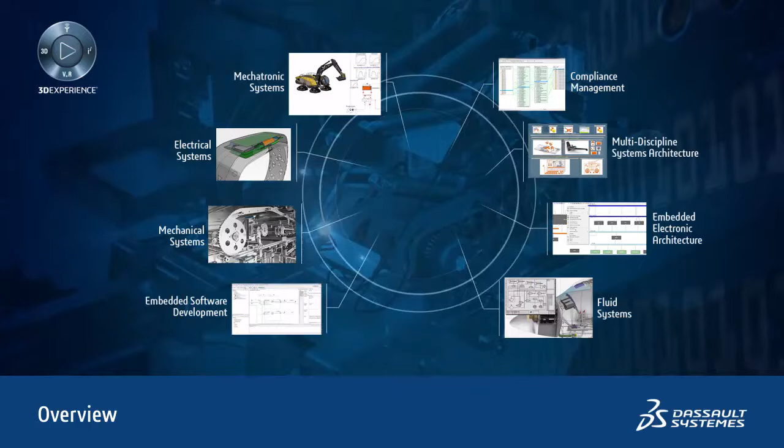Today, you'll learn how the Dassault Systèmes 3DEXPERIENCE platform connects all aspects of complex systems to streamline multiple disciplines by using the power of 3D to simulate and validate the behavior of products and their embedded systems. The platform delivers an integrated model-based systems engineering environment to imagine, engineer, and experience high-fidelity digital connected replicas that accurately predict a product or system's behavior through 3DEXPERIENCE, just like in real life.

But why do we want to put 3DEXPERIENCE at the heart of the systems development process? Because in many industries, up to 80% of product innovations come from embedded systems. These systems can account for up to 20 to 40% of a product's development costs. And yet, for more than 60% of the development time, no real prototypes exist.

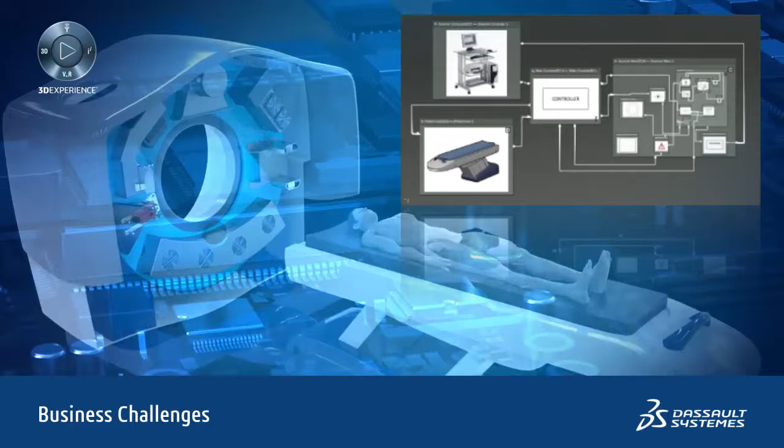And even when they do exist, they're costly to produce and often incorrectly defined and are utilized in a suboptimal way. Less than 10% of systems engineers typically get validation time with these prototypes, resulting in a late discovery of system errors. Errors that are often caused by system architects' choices not being validated until late in the design process, resulting in system elements not behaving as expected when they're integrated with other systems and the overall product.

This complexity, when coupled with the ever-increasing requirement to comply with stringent regulatory and industry standards, results in more than 40% of projects being delivered late or even failing altogether through the poor management and traceability of systems requirements.

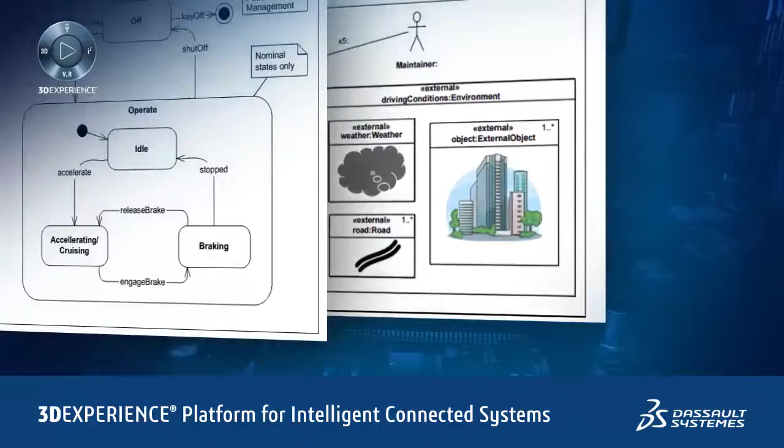These problems are caused by engineers using a multitude of disconnected systems engineering tools that can create thousands of different models of the systems being developed, with each tool having its own view or model of the system. But these individual models are largely disconnected from each other, as they are authored and managed by different legacy and proprietary tools.

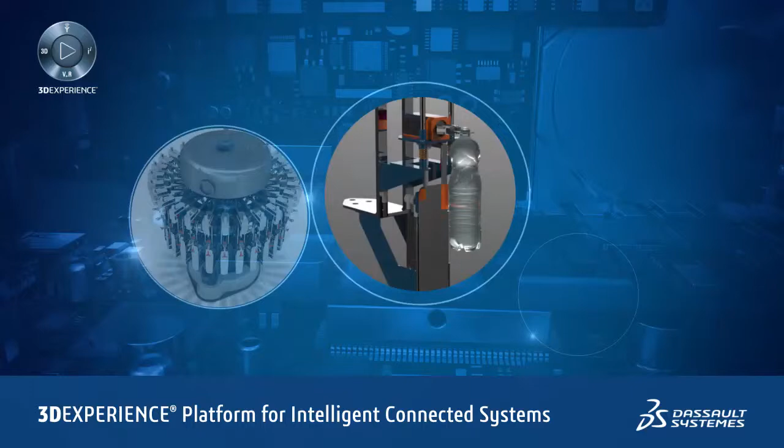This makes it difficult to build complete and consistent system views that integrate multiple engineering disciplines. It makes it extremely complex and costly to model and simulate the behavior of systems in the context of a complete product, and also impossible to easily reuse system assets across multiple product options and programs.

The business impact of these issues is increasingly serious. Programs are delayed, products are poorly integrated with suboptimal system design, and engineering costs are inflated by unsynchronized and duplicated development effort. And it's getting worse.

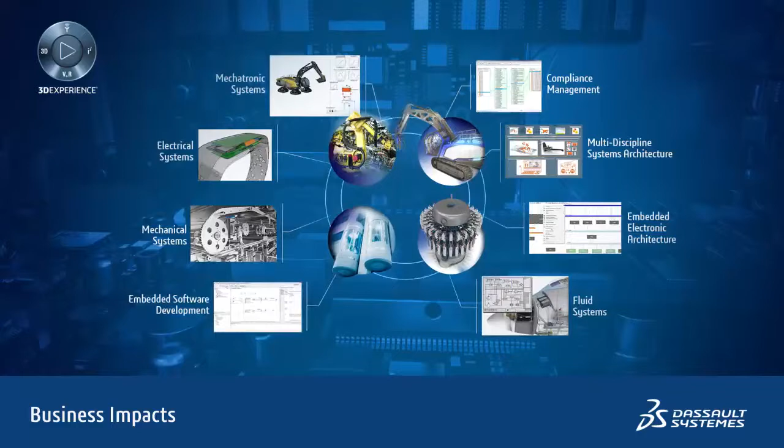As product complexity and demands for variance increases, it becomes more difficult to master and optimize the development effort, often resulting in duplicated data. This data becomes difficult to manage across all programs, options, and variants.

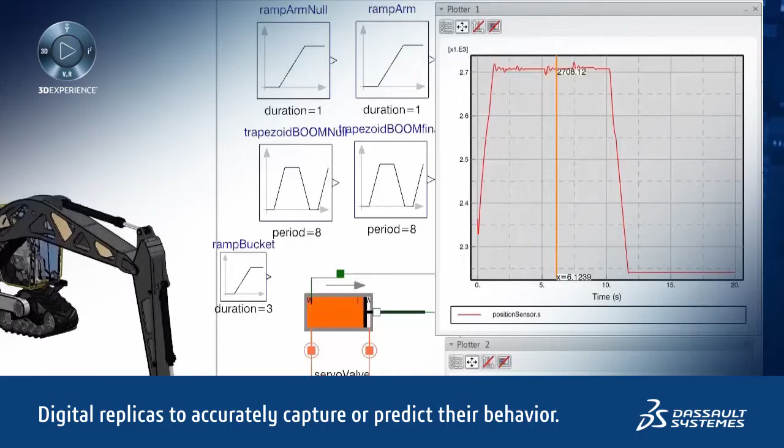What's needed to address these challenges is an integrated model-based systems engineering environment that drives the creation and management of digital replicas, existing or future systems, to accurately capture or predict their behavior.

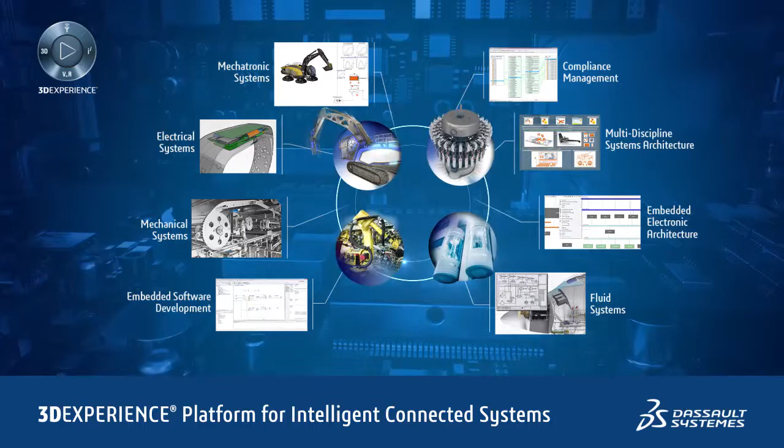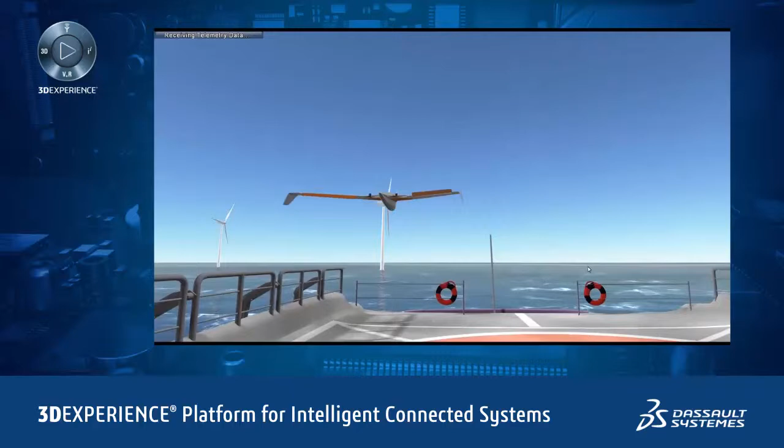We create these 3D experiences by using an open development environment that brings all engineering disciplines together to collaborate, define, and share a common and consistent systems definition. A definition we use to model and simulate the behavior of systems in the context of a complete product and its environment, just like in real life, and reuse system assets across multiple product programs and model families.

Dassault Systèmes addresses these challenges with a collaborative and open 3D experience platform for model-based systems engineering. This platform enables users to design and experience connected products and systems through a continuous, intelligent engineering development process. Let's explore what we mean by 3D experience in the context of systems engineering in an intelligently connected environment.

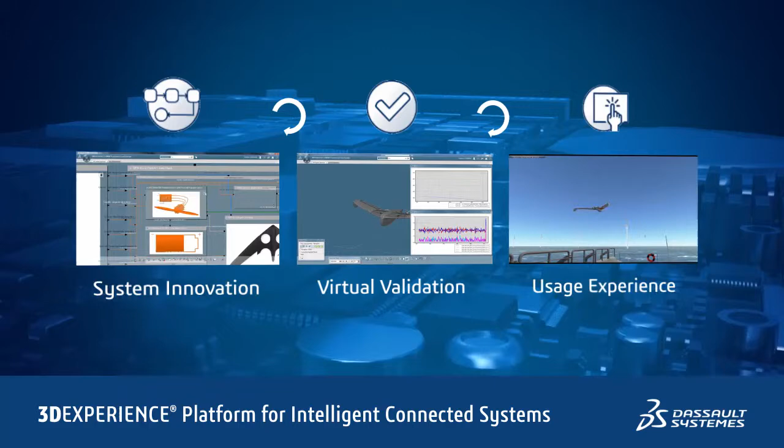We provide an end-to-end solution with digital continuity to design complex products and systems, starting from their planned usage through the design and implementation, and optimize, verify, and validate these systems through virtual simulations at the conceptual design stage, reducing the need for physical prototypes. The closed-loop digital continuity between design and validation improves engineering productivity and delivers improved product quality.

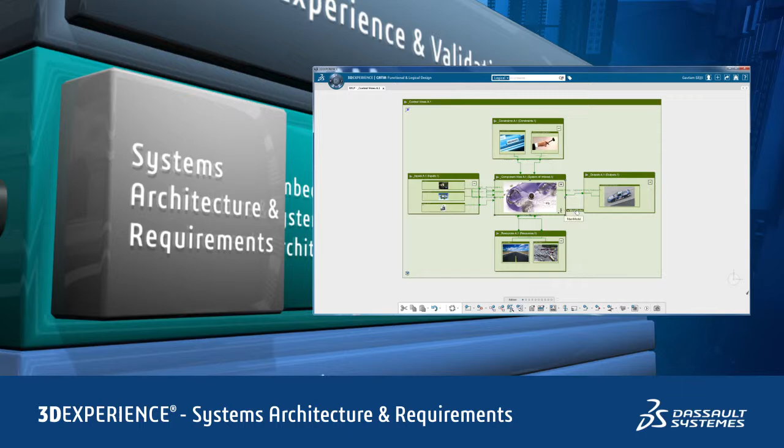This 3DEXPERIENCE platform is an open environment that can be used in conjunction with your existing tools and adapted to suit your processes. It comprises a set of integrated applications that covers systems architecture and requirements, to define and compose the system by considering multiple viewpoints through a set of integrated requirements and architectural models.

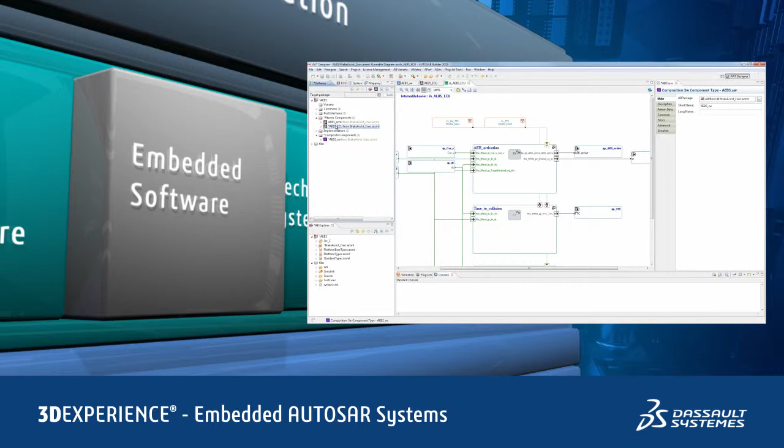Systems embedded architecture, to define, manage, and implement complete embedded architectures with electronic and electrical components and their interfaces. Embedded software solution includes AUTOSAR Builder, a rich toolset for developing AUTOSAR-compliant embedded systems for the automotive and construction equipment industries. And Control Build, a rich solution that accelerates the design, development, and validation of control systems that comply with industry and regulatory standards such as EN 50128 and IEC 61131-3 for the train, railway, process energy, and plant automation industries.

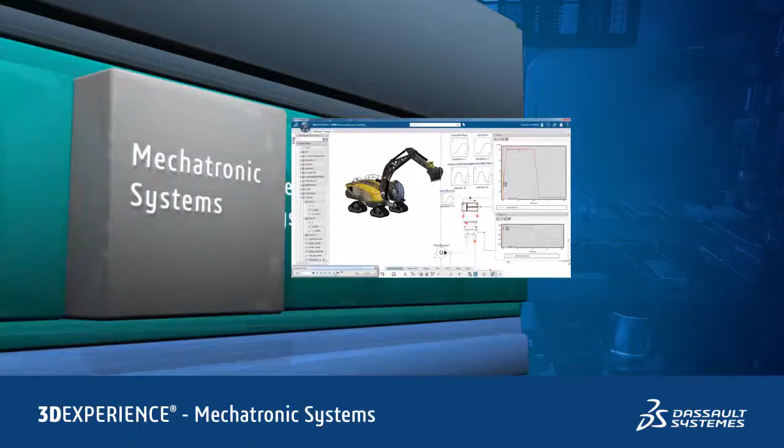Mechatronic system behavior modeling using open standards Modelica and functional mockup interface, where we simulate the system definition to predict and validate upfront the system behavior.

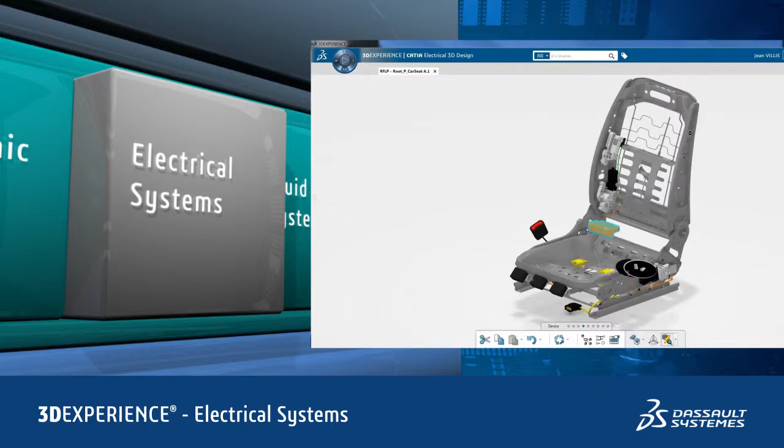Electrical systems to define the wire harness cable systems needed to provide the electrical interconnect between the different electrical components, system control units, sensors, and actuators within the product.

Fluid systems to define the tubing, piping, and ducting systems required to provide the necessary hydraulic, pneumatic, and fluid transfer capabilities needed by the product.

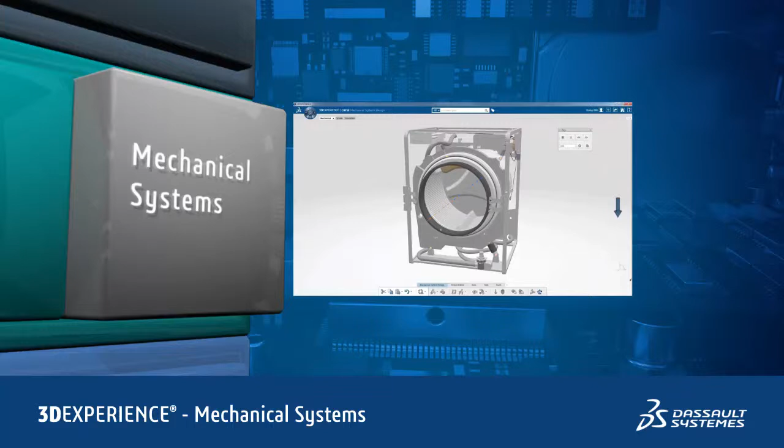And mechanical systems to define and simulate the realistic motion of complex mechanical systems by considering the influence of kinematic mechanisms and the underlying forces caused by mass and gravity.

We manage the creation and life cycle of all these system assets through a rich collaborative framework that supports the creation, sharing, and reuse of information.

The 3DEXPERIENCE platform accelerates time to value by delivering powerful, cross-discipline collaboration capabilities that span all stages of the system's definition, design, simulation, and validation processes through powerful services for social collaboration, dashboarding, visualization, and content management.

It provides a scalable solution capable of supporting systems development from the smallest to the largest and most complex engineering projects.

Program and lifecycle management with configuration and change management of all assets and management of product lines, and use powerful tools to manage and document compliance with industry and regulatory standards.

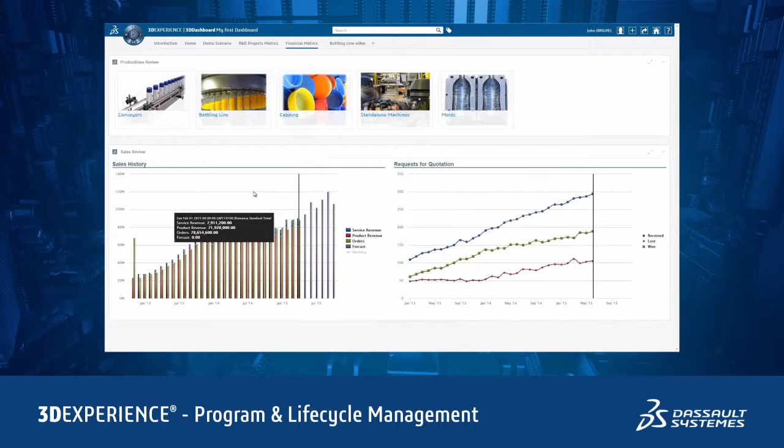It integrates program and earned value management directly within the systems design environment, with task status collection and budget allocation and usage becoming a natural part of the design process itself.

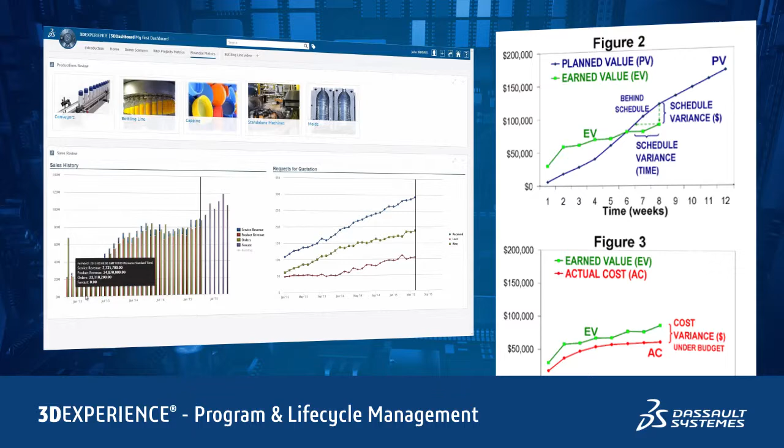By collecting information passively throughout the design process, it provides decision makers with real-time assessments and gives increased confidence in information. The platform provides full traceability of information relationships across all models with a unified change and configuration management process.

This enables early visibility of the impact of changes to all data consumers, including across the supply chain, all in the context of a configured systems definition.

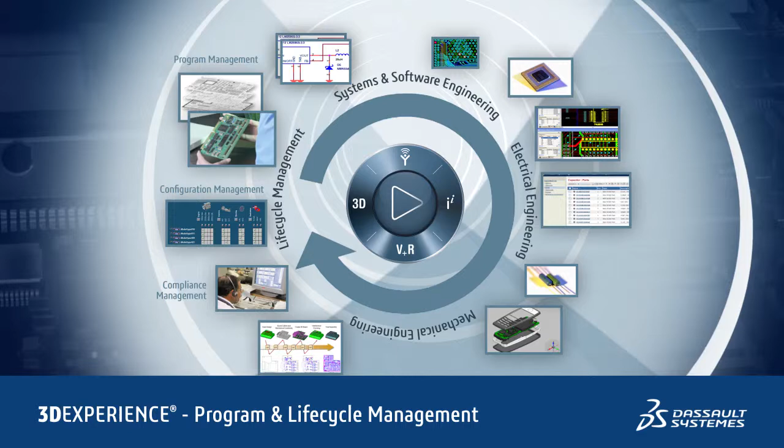Designing systems in a configured context means that we design the master system and all its variants simultaneously. We develop a single standardized platform for all product lines with functional and physical variants based on customer and market needs.

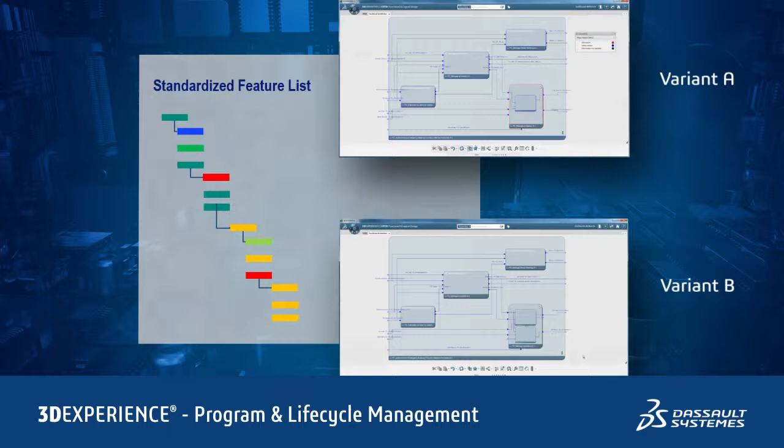By reducing the number of explicit system definitions, we reduce the number of definition assets, the duplication and number of tests, and increase system asset reuse across multiple product options and programs.

The 3DEXPERIENCE platform also helps you manage and demonstrate compliance with systems requirements and industry-specific standards and regulations such as those demanded by FAA, FDA, or international standards organizations.

Using powerful dashboarding, traceability, and analysis capabilities across more than 60 systems engineering tools, it's possible to assess the completeness of requirements coverage and impact of system changes across all engineering data at both the project and the program level.

What sets this solution apart is the fact that all applications within the 3DEXPERIENCE platform share an open and extensible common data model and repository to deliver a consistent view of information across all engineering disciplines and applications.

The platform supports multiple open standards, including the Codex of PLM Openness, an initiative to establish the openness of IT systems in the context of PLM between customers, tool vendors, and service providers.

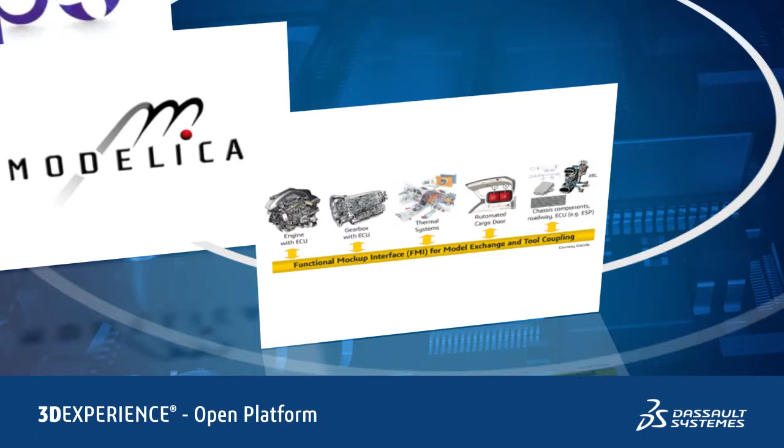Modelica, a standard open and object-oriented language for modeling and simulation of multi-domain physical systems. Functional Mockup Interface, a tool-independent standard to support both model exchange and co-simulation of dynamic systems models.

AutoSAR, an open and standardized automotive software architecture that enables the development and reuse of automotive software components. And finally, OSLC, Open Services for Lifecycle Collaboration, a set of specifications that enables integration of PLM, ALM, and IT software.

The platform is built on an open and extendable common data model and repository that provides a single source of truth to ensure all stakeholders always work with the same systems definition, design, and simulation data.

It protects your existing investment in tools and processes through standards-based integration and sharing of information across common systems engineering tools. In addition, it enables you to quickly and easily get real business intelligence from the huge volume of distributed and fragmented systems information.

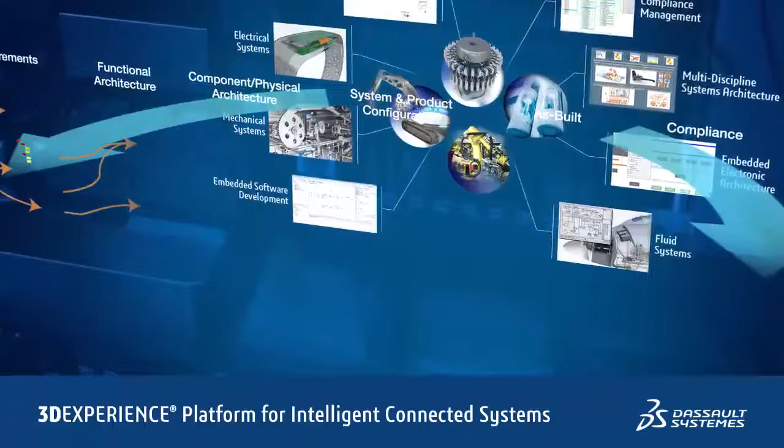Through powerful big data monitoring, federation and analytic capabilities accessed through rich user-definable dashboards.

So to summarize, the Dassault Systèmes solution delivers an open and powerful model-based system engineering development platform. It integrates all engineering disciplines through the definition of multiple system views in a continuous engineering environment that can be adapted to your specific systems engineering methodologies.

An environment that can manage and analyze large amounts of data and enable the translation of this data into innovative system designs through collaboration with partners and suppliers that accelerate the development and validation of systems through rich 3D experience and transform the way organizations define, model, simulate, and validate complex systems.